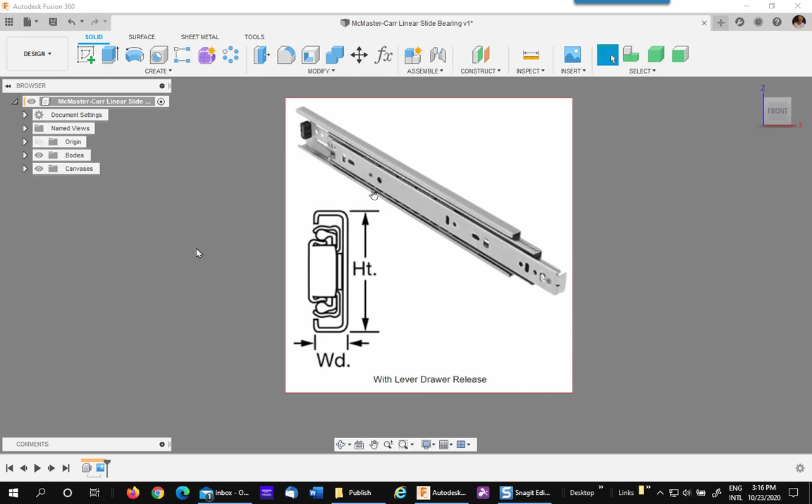So let's get started. What you're seeing is a download from McMaster-Carr of my linear slide bearing. Now it's a bunch of bodies, so you want to leave them in this position until we get them joined together.

Let's take a look at the bodies first. I'm going to go ahead and look at the end view, rotate it around and zoom up a little bit. Now you'll notice there are some ball bearings and carriers.

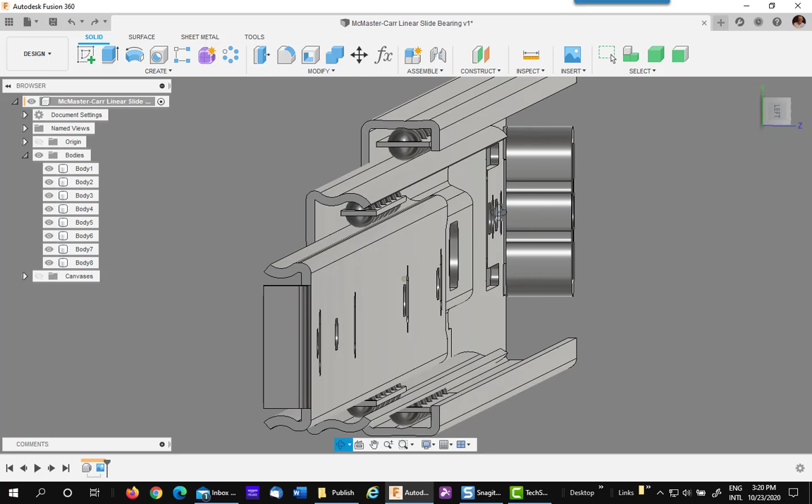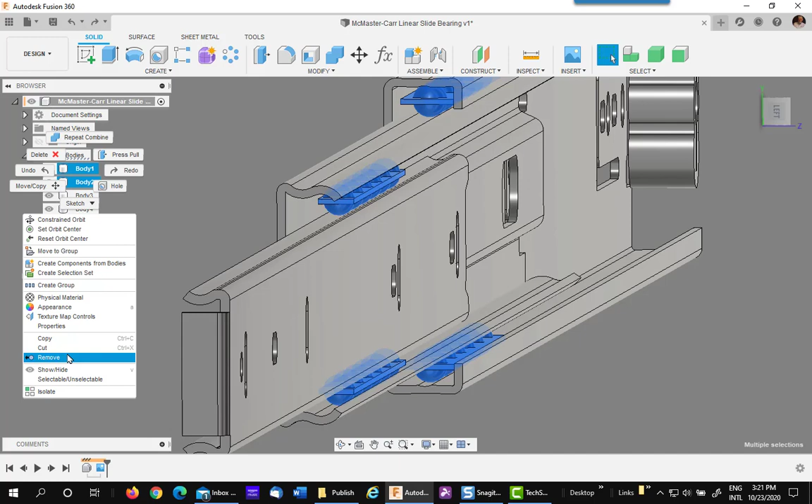They're only partial anyway, we really don't need those. So identify those as bodies and get rid of them. To do that, just click on them, hold down the control key and click on them, and find all of them. There they are, all highlighted. Now you want to right click and hit remove on top of one of them. Do not hit delete, otherwise you will have some issues.

The next thing you want to notice is that there is a bumper at the rear that we want to be combined with the last section of track. So go to your combine command, which is under modify, and pick on that bumper and the last piece of track.

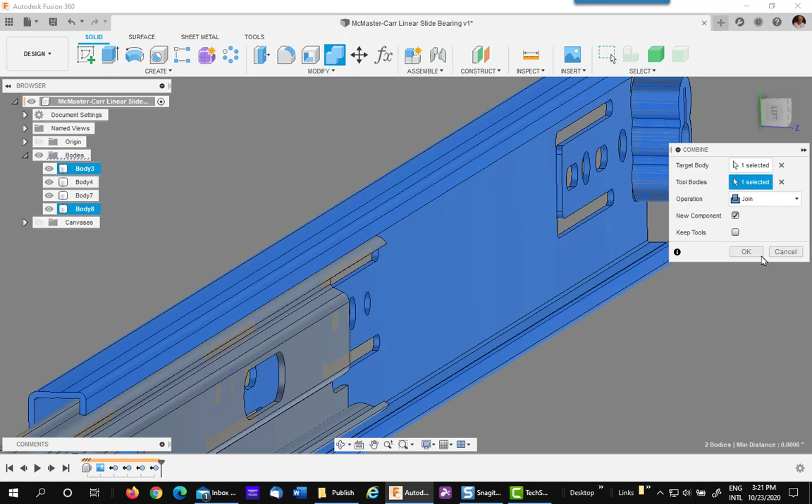You're going to join them together and end up making a new component, because we're going to turn the other things into components also. So say OK, and we have a new component.

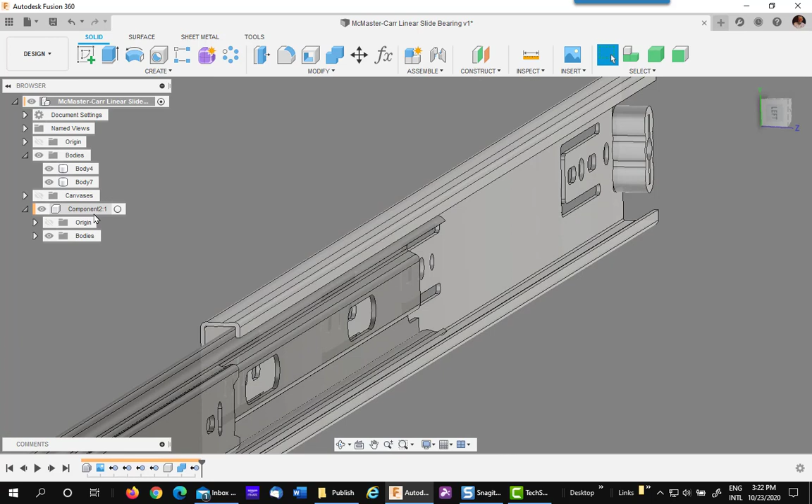Now that body still remains, and so does this one right there. We want to get rid of that. Again, remove that because it became a part of this component. We don't need it anymore. So we have two bodies and one component, which consists of that bumper.

The next step will be to make these two last bodies into components. So again, you can select both of them, right click and say create components from bodies. We now have our three components.

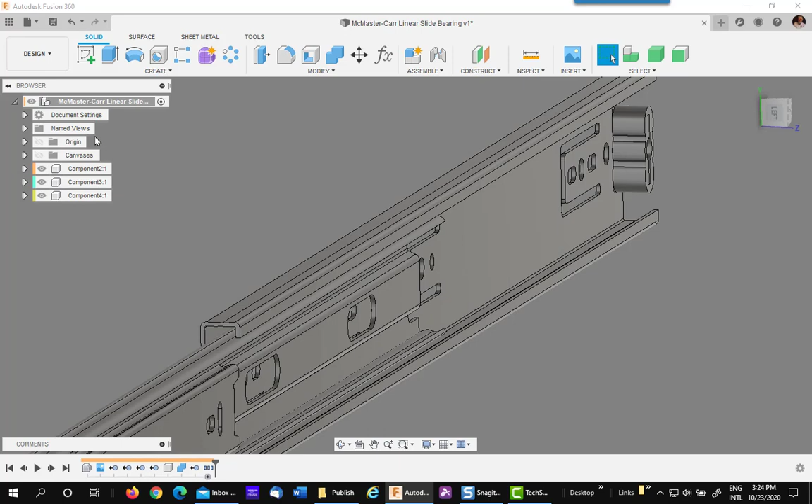Now we can join them together. The next step we want to do is take some measurements so we can get our joints in the right position. So go to the end view again, then slightly move it off so you can see the back side and zoom up.

Now if you have the Windows multi-clipboard, you can be sure it's empty and we can place our measurements directly on the clipboard for future use. If you do not have this installed, just get out a piece of paper and write them down.

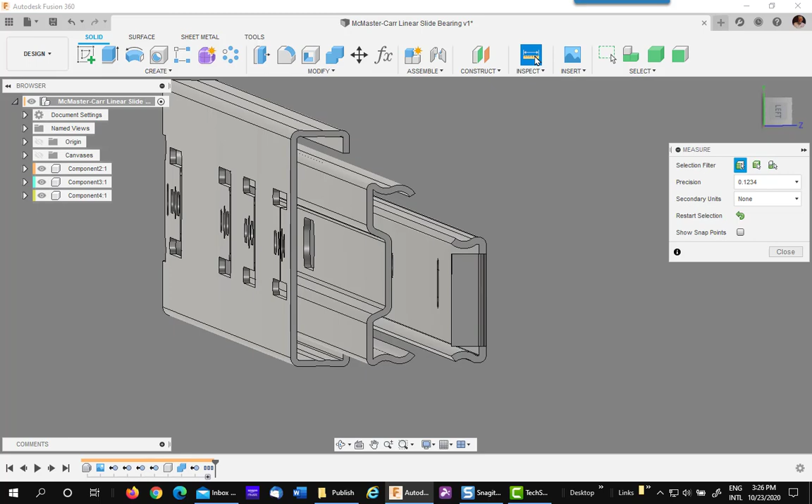So we go to inspect and want to measure from this surface - be sure you pick on the surface - to this edge right there. That is that number, 2.2718. Click on it to put it on the clipboard.

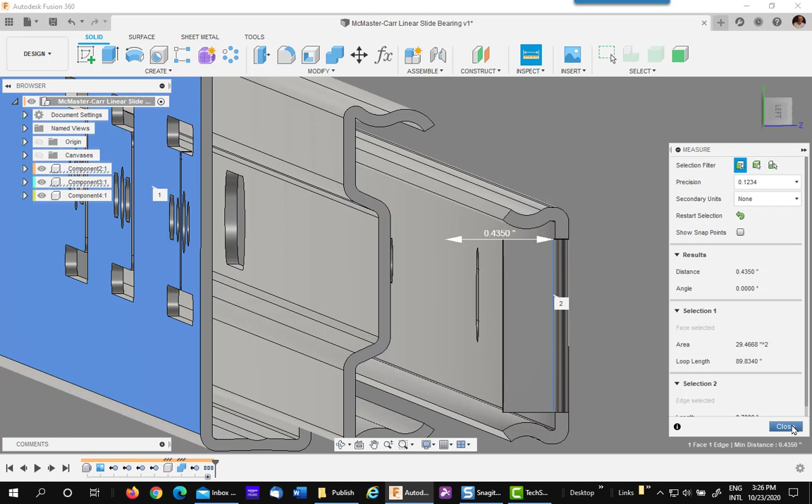Reset and do it again from this to that line right there, and that number is there. Click again to go to the clipboard. Close your measure tool, and then if you pull up your clipboard, you'll see I have both those dimensions.

If not, you got them on a piece of paper.

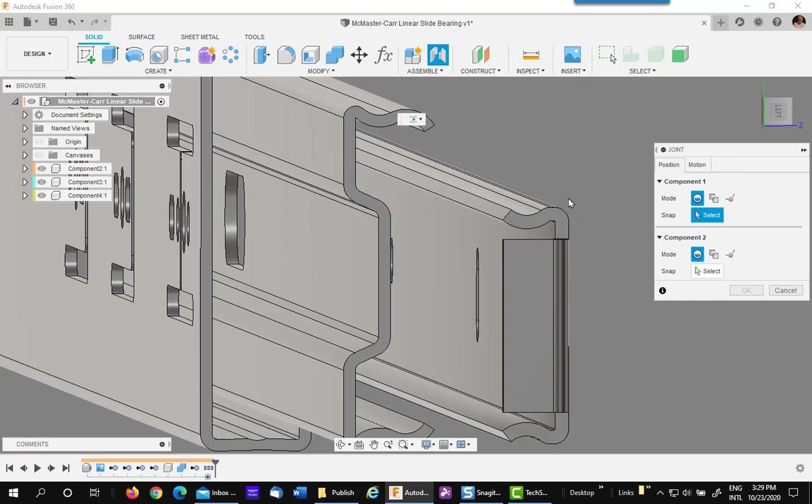The next step is to add our slider joints. Go to Joints, pick Slider if it's not already selected. You're looking for the first one, from this face, at that point.

If you have trouble finding it, hover over the face and hold down the control key, and it will not go to any point except on this face. Pick this one, the far back side. Then go over to here.

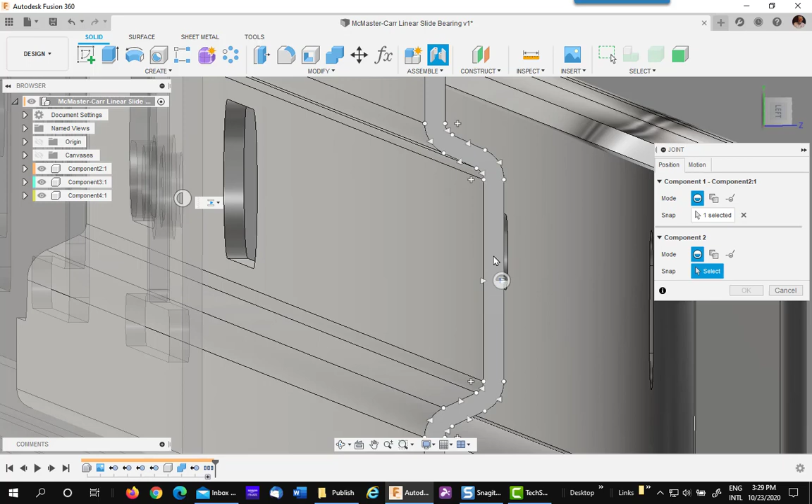Again, if you have trouble, hover, hold down the control key, and pick the furthest one to the side. It's going to flip on you, so reverse it, and you'll notice it's moved way back here, so we need to move it back into position.

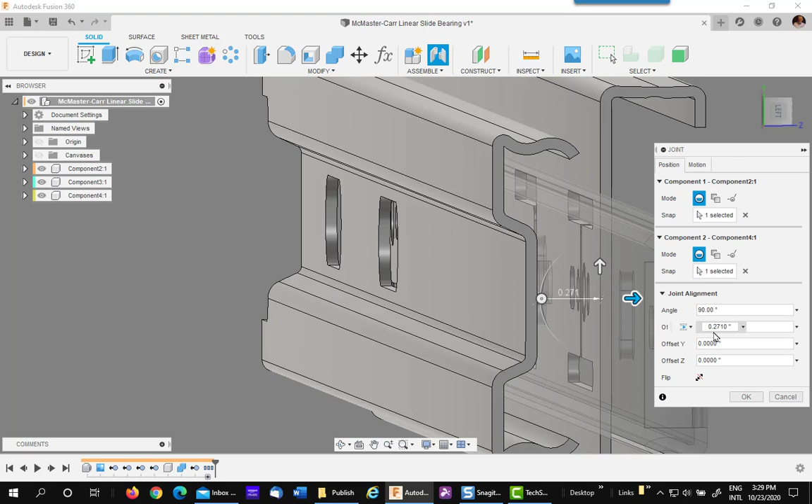That movement will be positive in this case, so we'll click on that, our Windows clipboard, and pick on this number. Whoops, it's negative, I apologize. So I'll just go up here and add a negative real quick, and that puts it in position.

Say OK, that's your first slider. Next you want to do the same thing, a slider joint between this point right there and this one - again hover, hold down control, and pick that midpoint right there.

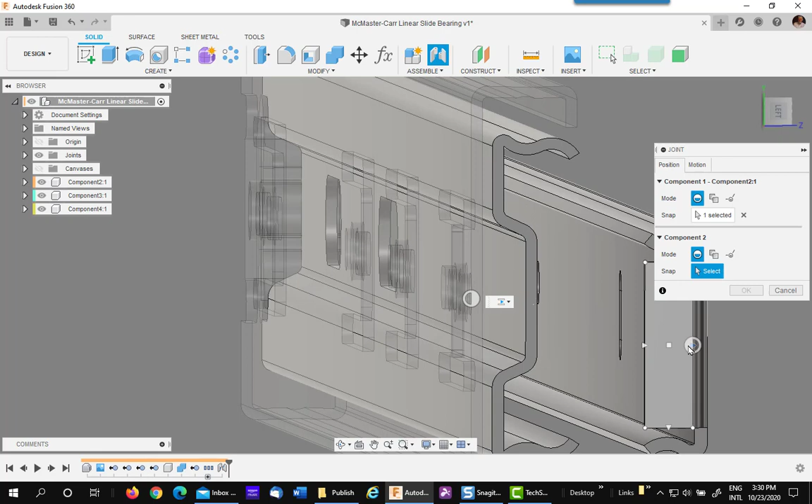It flips on you, flip it, and then hit a negative again. So I just hit minus, go to my Windows clipboard, and pick up the last dimension. It puts it into position. Say OK - now you have both your slider joints in place.

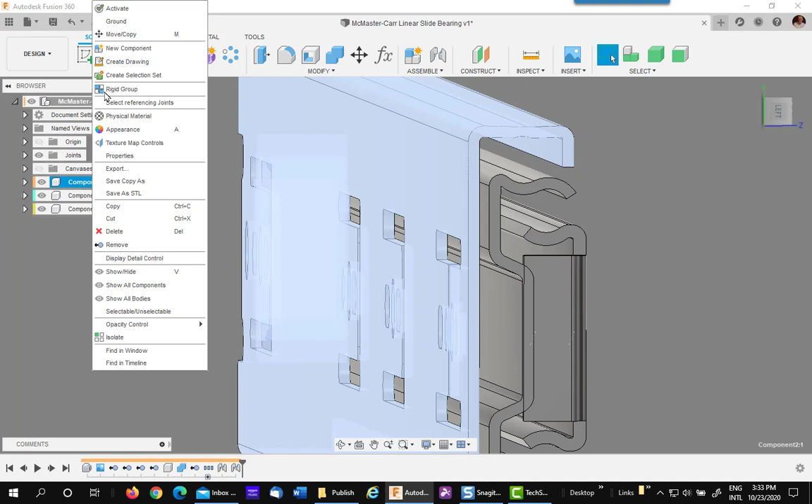At this point you can drag it around, but you'll notice not everything is moving. So what do we need to do? Reposition it, and then ground this component in the back - right click on that component and ground it. Now you can slide your slider joint, but it's not behaving correctly, so we need to fix it.

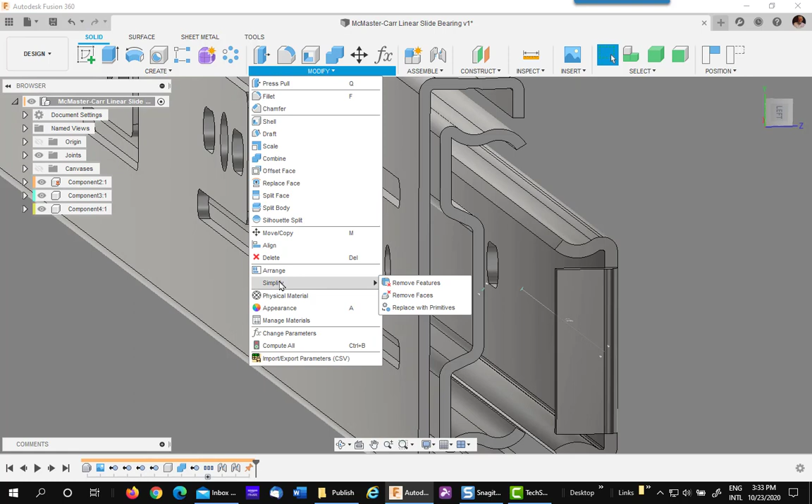First, get this in the right position - this stop hits against this. So I'd suggest using an Align command from your Modify drop-down. Pick on the back side of this face, then touch this face, and they'll line up. That is a flat to flat alignment.

Now we can add our linear limits to this. Our next step is to add a limit to this joint movement - this slider, the last one we did, of 20 inches, because this is a 20-inch bearing.

So I right click on Slider 2 - if you did it in reverse order it'd be different - and choose Edit Joint Limits, minimum, maximum. I previously filled these in. The minimum is minus 20 because it's a negative movement, and 0 is the maximum. Yours could be reversed depending on your joint, but Fusion requires you to have the smallest number on top.

Say OK, and that will make it so it can go no further than 20 inches. Revert it back to position.

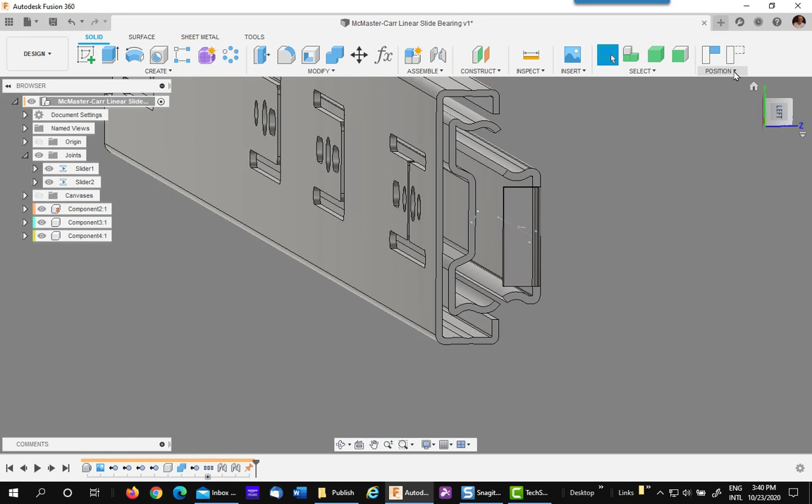Now the next thing you want to do is go in here and make a motion link between these two rails, or these two joints, so one slides at half the speed of the other.

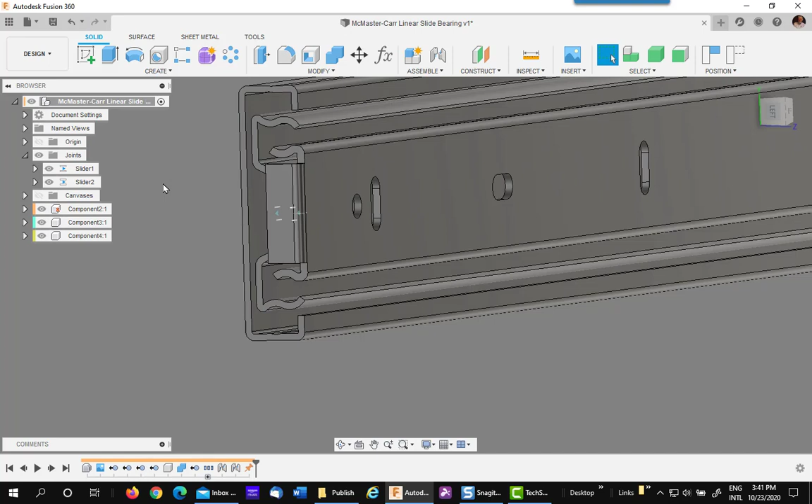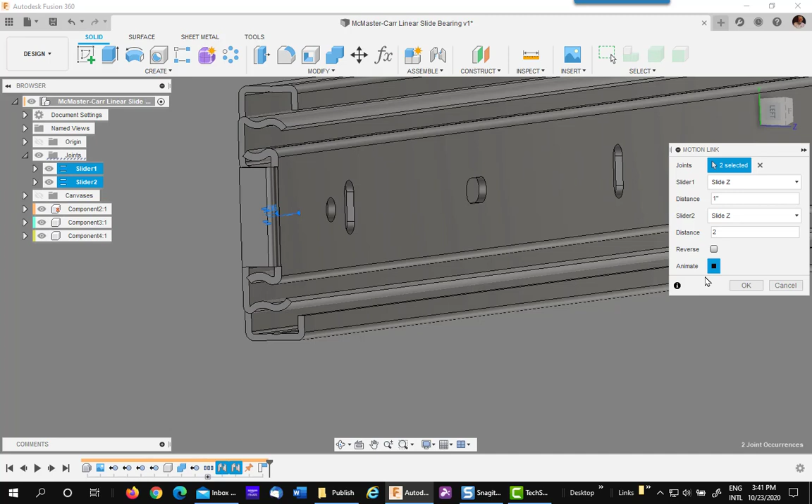We'll go to Motion Link, pick on the two joints, and we will make them 2 to 1. Now you may have it backwards, which I do, so I'll make this 1 and this 2. You can use any ratio that's 2 to 1 - it doesn't matter, it could be 5 and 10, 1 to 2, whatever.

Say OK. Now as you can see, when you slide that joint, it moves like a linear bearing would, and it stops at 20 inches.

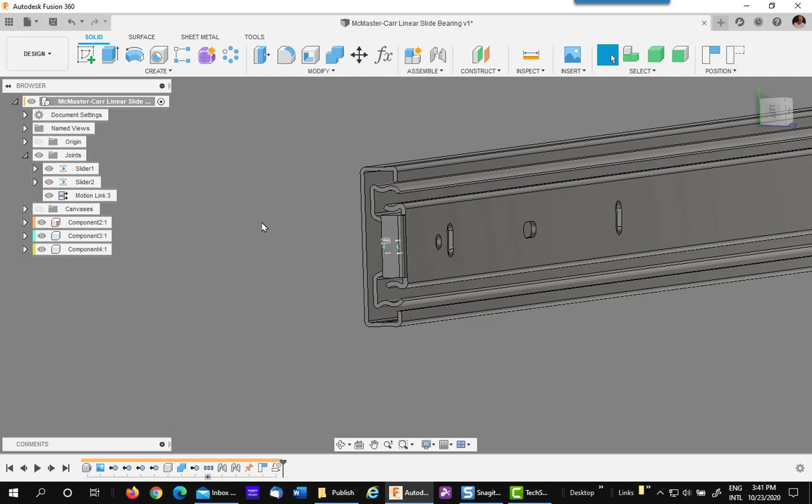So you're all done - you have a fully functional linear slide for your projects. Hope this helped you do better modeling in Fusion 360.